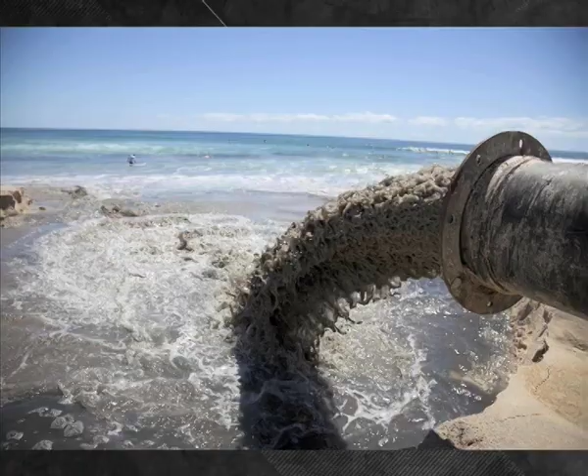Industry-related water pollution comes from toxic chemicals and heavy metals from mining and manufacturing, and power plant emissions that create acid rain that contaminates the surface water. People often bathe, wash their clothes and swim in contaminated water. They also drink water of uncertain quality coming from ponds and streams used by animals.

The water and air around the cities are polluted, and the water shortages and quality issues in rural areas are still rampant. Therefore, we need to do water management. Now, one may ask what water management is and what are the techniques of managing water. So, water management is the need of the time. It is the management of water resources for the coming generations.

It involves the activity of planning, developing, distributing and managing the optimum use of water resources. We would discuss the different methods through which water management and preservation can be done. Some of them are explained here. Let's start with rainwater harvesting. One of the most popular techniques is rainwater harvesting, which is the collection and storage of rainwater rather than allowing it to run off.

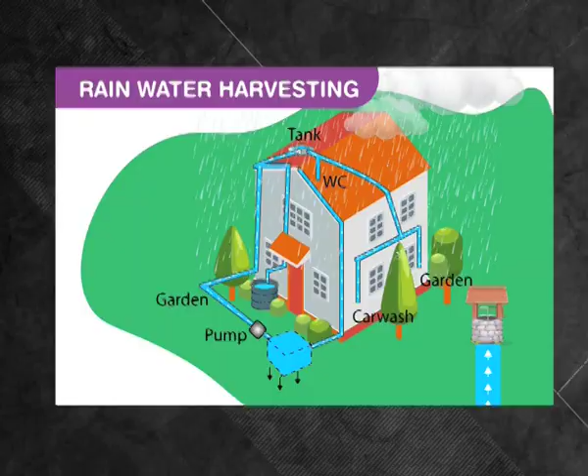Rainwater is collected from a roof-like surface and redirected to a tank, cistern, deep pit, well shaft or borehole, aquifer or a reservoir with percolation. Dew and fog can also be collected with nets or other such tools. Rainwater harvesting differs from stormwater harvesting, as the runoff is collected from roofs rather than creeks, drains, roads or any

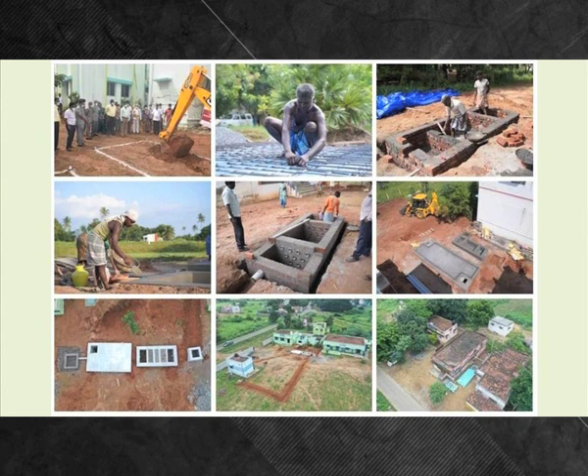other land surfaces. Its uses include watering gardens, livestock, irrigation, domestic use with proper treatment and domestic heating. The harvested water can also be committed to long-term storage or groundwater recharge. As an example, we talk about Tamil Nadu, which was the first state to make rainwater harvesting compulsory for every building to avoid groundwater depletion.

The scheme was launched in 2001 and has been implemented in all rural areas of Tamil Nadu henceforth. Posters all over Tamil Nadu, including rural areas, create awareness about harvesting rainwater. It gave excellent results within 5 years, and slowly every state took it as a role model. Since its implementation, Chennai has seen a 50% rise in water levels in 5 years, and the water quality significantly improved.

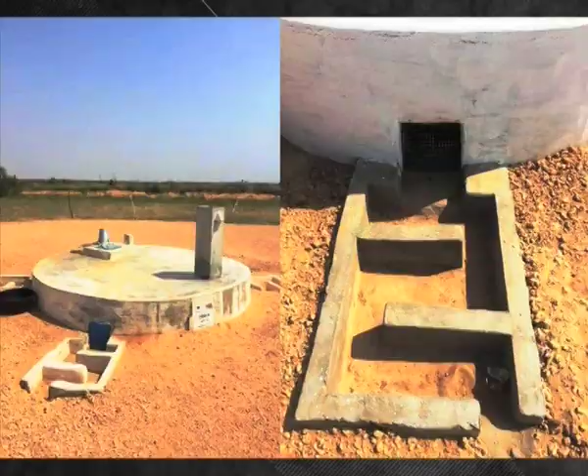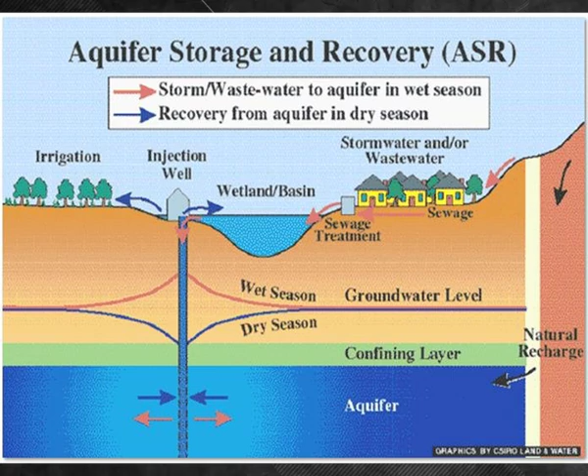In Rajasthan, where there is utmost dearth of water, rainwater harvesting has traditionally been practiced, especially by the people of the Thar Desert. Many ancient water harvesting systems in Rajasthan have now been revived. Another very powerful technique is groundwater recharge. Groundwater recharge is the enhancement of natural groundwater supplies using man-made conveyances such as infiltration basins, trenches, dams, or injection wells. Aquifer storage and recovery is a specific type of groundwater recharge practiced with the purpose of both augmenting groundwater resources and recovering the water in the future for various uses.

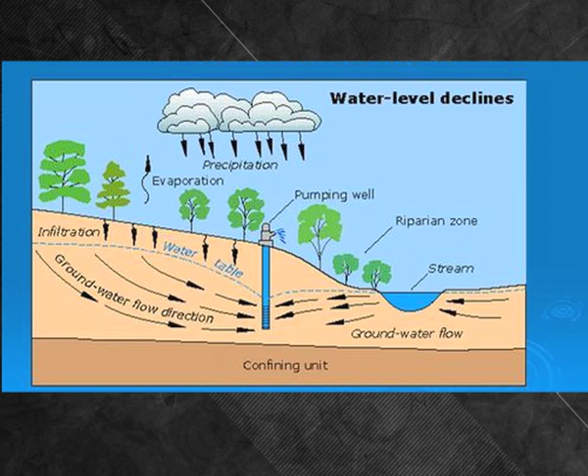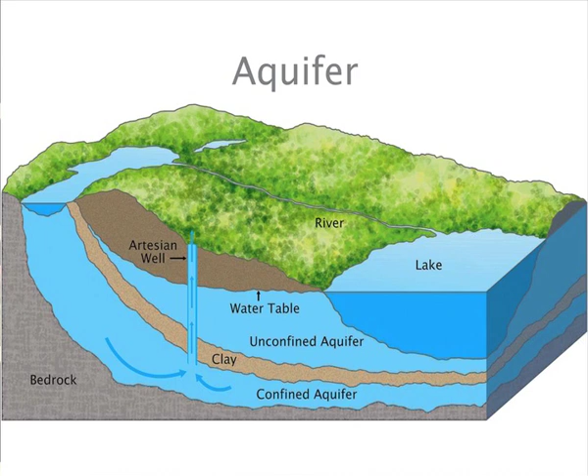Groundwater is recharged naturally by rain and snow melt, and to a small extent by surface waters. Recharge may be impeded somewhat by human activities, including paving, development, or logging. These activities can result in the loss of topsoil, resulting in reduced water infiltration, enhanced surface runoff, and reduction in recharge. The use of groundwater, especially for irrigation, may also lower the water tables. Groundwater recharge is an important process for sustainable groundwater management, since the volume rate abstracted from an aquifer in the long term should be less than or equal to the volume rate that is recharged.

Recharge can help move excess salts that accumulate in the root zone to deeper soil layers or into the groundwater system. Tree roots increase water saturation into groundwater, reducing water runoff. Flooding temporarily increases riverbed permeability by moving the clay soil downstream, and this increases aquifer recharge. A simple and useful technique of water conservation is artificial groundwater recharge. Groundwater levels are declining across the country as our withdrawals exceed the rate of aquifers to naturally replenish themselves, called recharge. One method of controlling declining water levels is by using artificial groundwater recharge.

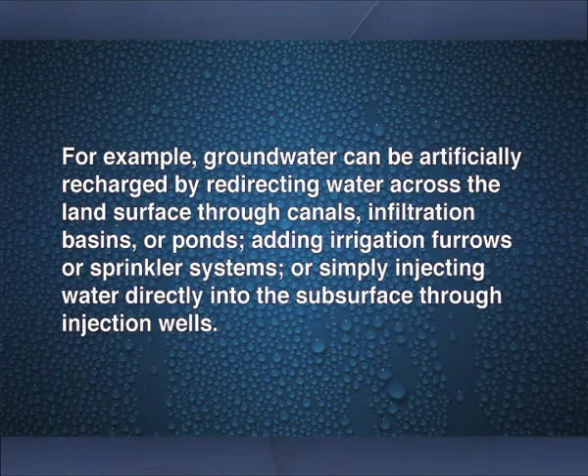Artificial recharge is the practice of increasing the amount of water that enters an aquifer through human-controlled means. For example, groundwater can be artificially recharged by redirecting water across the land surface through canals, infiltration basins, or ponds, adding irrigation furrows or sprinkler systems, or simply injecting water directly into the subsurface through injection wells. Artificial groundwater recharge is becoming increasingly important in India, where the overpumping of groundwater by farmers has led to underground resources becoming depleted.

In 2007, on the recommendation of the International Water Management Institute, the Indian government allocated 1,800 crores to fund dug well recharge projects. A dug well is a wide, shallow well, often lined with concrete, in 100 districts within 7 states where water stored in hard rock aquifers has been overexploited. Another environmental issue is the disposal of waste through water, from sources such as dairy farms, industrial and urban runoffs. A new and useful method of saving water is drip irrigation.

Drip irrigation is a type of micro-irrigation system that has the potential to save water and nutrients by allowing water to drip slowly to the roots of the plant, either from above the soil surface or buried below the surface. The goal is to place water directly into the root zone and minimize evaporation.

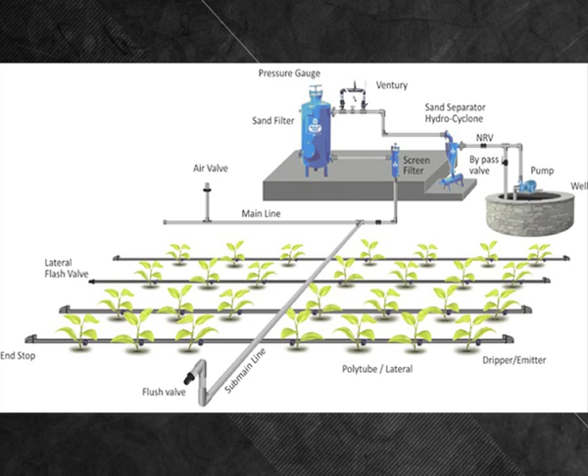Drip irrigation systems distribute water through a network of valves, pipes, tubing, and emitters. Depending on how well designed, installed, maintained, and operated it is, a drip irrigation system can be more efficient than other types of irrigation systems, such as surface irrigation or sprinkler irrigation.

In the drip irrigation process, water and nutrients are delivered across the field in pipes called dripper lines, featuring smaller units known as drippers. Each dripper emits drops containing water and fertilizer, resulting in the uniform application of water and nutrients directly to each plant's root zone across an entire field.

A drip irrigation system delivers water to the crop using a network of main lines, sub-mains, and lateral lines with emission points spaced along their lengths. Each dripper emitter's orifice supplies a measured, precisely controlled uniform application of water, nutrients, and other required growth substances directly into the root zone of the plant.

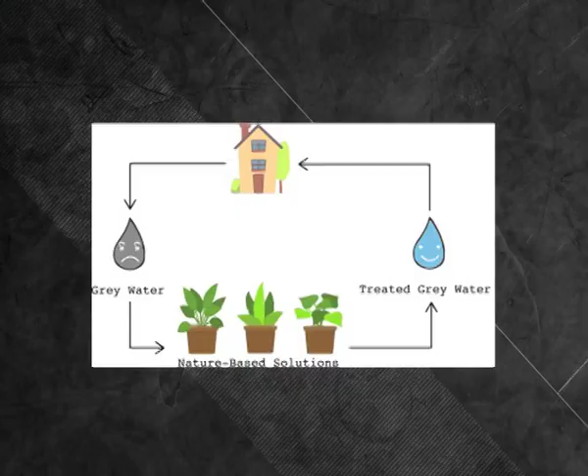Another very unconventional way of saving water is by a technique called grey water. Grey water is gently used water from your bathroom sinks, showers, tubs, and washing machines. It is not water that has come into contact with feces, either from the toilet or from washing diapers. Grey water may contain traces of dirt, food, grease, hair, and certain household cleaning products. While grey water may look dirty, it is a safe and even beneficial source of irrigation water in a yard.

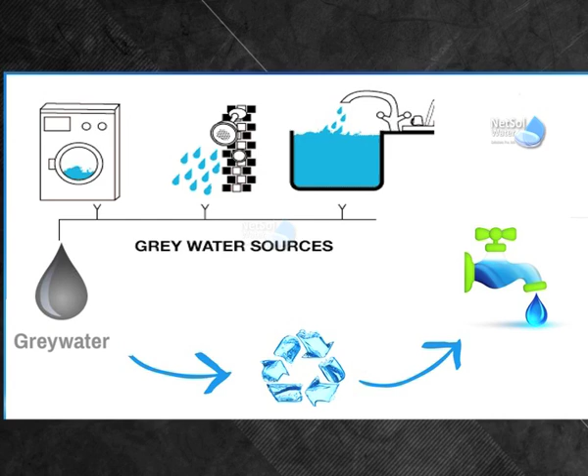Grey water is water from basins, baths, and showers that is piped to a surge tank. The grey water is held briefly in the tank before being discharged to an irrigation or a treatment system. The grey water can be diverted either by gravity or by using a pump. The surge tank can be a type of container that is suitable for holding but not storing the initial surge of the water.

The surge tank must be emptied completely each time grey water is dispersed to the irrigation or treatment system. Grey water must not sit for extended periods of time in the tank. A gravity system can only be used when there is sufficient fall from the laundry or bathroom drain to the storage tank.

An old but very useful technique is sewage water treatment. Sewage treatment is the process of removing contaminants from municipal wastewater, containing mainly household sewage plus some industrial wastewater. Physical, chemical, and biological processes are used to remove contaminants and produce treated wastewater, or treated effluent, that is safe enough for release into the environment.

A byproduct of sewage treatment is a semi-solid waste or slurry called sewage sludge. The sludge has to undergo further treatment before being suitable for disposal or application to land. For most cities, the sewage system will also carry a proportion of the industrial effluents to the sewage treatment plant, which has usually received pre-treatment at the factories themselves to reduce the pollutant load.

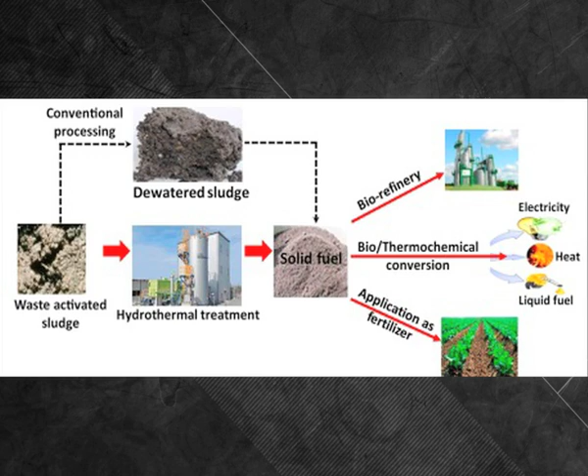If the sewer system is a combined sewer, then it will also carry urban runoff, storm water, to the sewage treatment plant. Sewage water can travel across treatment plants via piping, in a flow aided by gravity and pumps. The first part of the filtration of sewage typically includes a bar screen to filter solids and large objects, which are then collected in dumpsters and disposed of in landfills. Fat and grease are also removed before the primary treatment of the sewage.

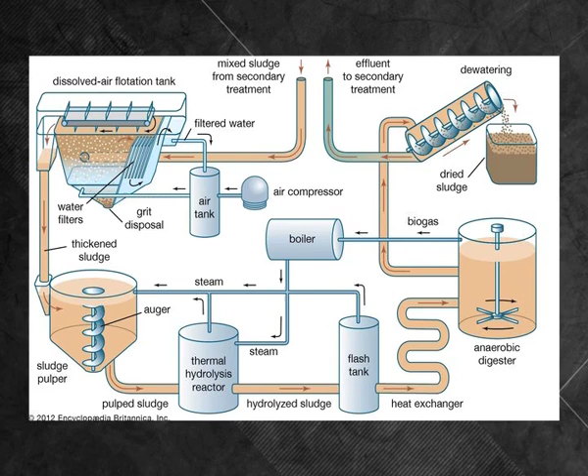Now let's move on to a very interesting water conservation technique in which there is coordinated use of surface water and groundwater. It is known as conjunctive use. We already discussed conjunctive use, a catchphrase for the coordinated use of surface water and groundwater, literally going with the flow to maximize sustainable yield. Conjunctive use of groundwater and surface water in an irrigation setting is the process of using water from the two different sources for consumptive purposes.

Conjunctive use can refer to the practice at the farm level of sourcing water from both a well and from an irrigation delivery canal, or can refer to a strategic approach at the irrigation command level, where surface water and groundwater inputs are centrally managed as an input to irrigation systems.

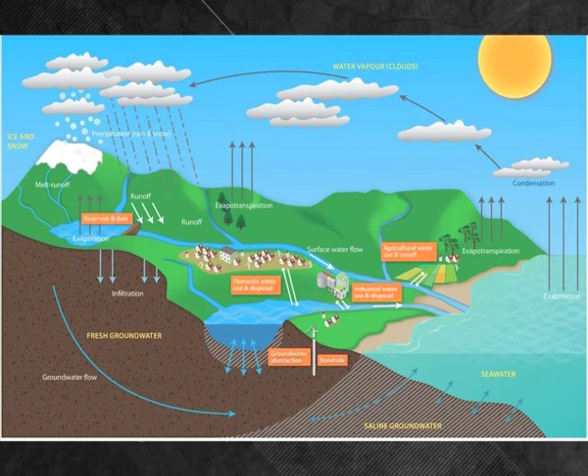The planned conjunctive use of groundwater and surface water has the potential to offer benefits in terms of economic and social outcomes through significantly increased water use efficiency. It supports greater food and fiber yield per unit of water use, an important consideration within the international policy arena, given the critical concerns for food security that prevail in many parts of the world.

In fact, at the resource level, groundwater pumping for irrigation used in conjunction with surface water provides benefits that increase the water supply or mitigate undesirable fluctuations in the supply, and control shallow water table levels and consequent soil salinity.

A well-practiced technique we will discuss now is aquifer storage and recovery. Aquifer storage and recovery is a direct injection of surface water supplies, such as potable water, reclaimed water, rainwater, or river water, into an aquifer for later recovery and use. The injection and extraction is often done by means of a well.

In areas where the rainwater cannot percolate the soil or is not capable of percolating it fast enough, that is, urban areas, and where the rainwater is thus diverted to the rivers, rainwater ASR could help to keep the rainwater within an area. ASR is used for municipal, industrial and agricultural purposes.

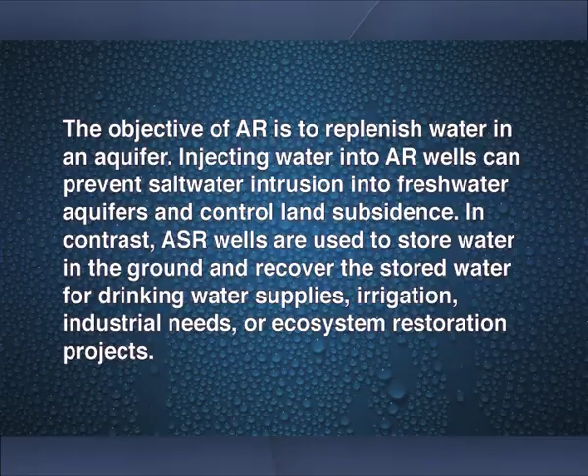The objective of AR is to replenish water in an aquifer. Injecting water into AR wells can prevent saltwater intrusion into freshwater aquifers and control land subsidence. In contrast, ASR wells are used to store water in the ground and recover the stored water for drinking water supplies, irrigation, industrial needs, or ecosystem restoration projects. The stored water may be recovered from the same well used for injection or from nearby injection or recovery wells.

We will now talk about desalting water and extracting minerals using desalination techniques. Desalination is a process that takes away the mineral components from saline water. More generally, desalination refers to the removal of salts and minerals from a target substance, as in soil desalination, which is an issue for agriculture. Salt water is desalinated to produce water suitable for human consumption or irrigation.

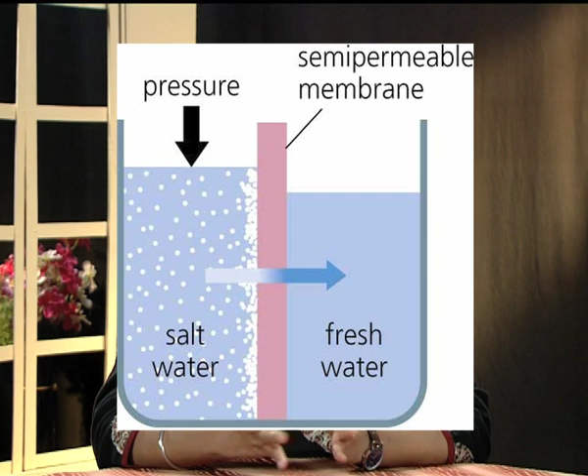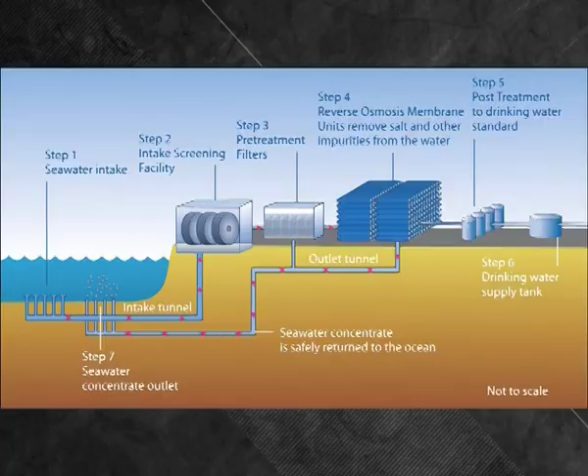The byproduct of the desalination process is brine. Desalination is used in many seagoing ships and submarines. Most of the modern interest in desalination is focused on the cost-effective provision of fresh water for human use. Along with recycled wastewater, it is one of the few rainfall-independent water resources. The process may be used for municipal, industrial, or commercial uses.

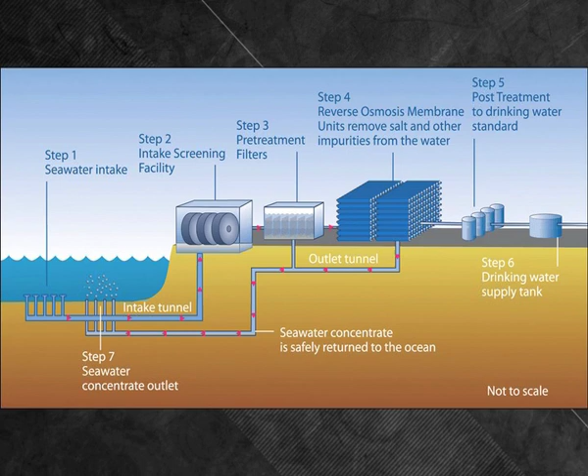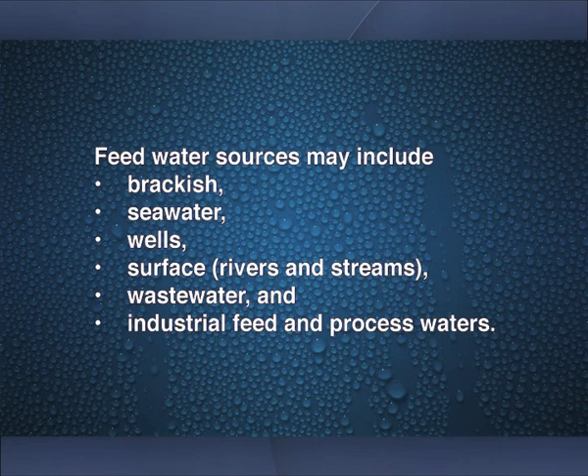The water desalination process separates the dissolved salts and other minerals from the water. Feed water sources may include brackish water, seawater, wells, surface water, that is rivers and streams, wastewater, industrial feed and process waters.

Membrane separation requires driving forces, including applied and vapor pressure, electric potential, and concentration, to overcome natural osmosis pressures and effectively force water through membrane processes. As such, the technology is energy intensive, and research is continuously developing and evolving to improve the efficiency and reduce the energy consumption. It's about time we start discussing the benefits of water conservation.

Water management can offer many benefits to state and local governments. Some of these benefits include reduced water and sewer costs. When we save water, we make more for the coming generations. Therefore, low flow water conservation devices reduce water usage and cost as well as sewer costs.

Weather-based irrigation controls. Decades ago, people used to depend on the weather for agriculture and water. This is not the case now. But when we conserve water, it affects the agriculture sector too. This type of control system saves water usage and cost, especially during the hot summer months.

Reduced energy usage. Energy deficit is an area of large concern, and thus saving energy is the key to a lot of problems. Interestingly, low flow water devices reduce the amount of hot water used, which in turn reduces the amount of energy used to heat the water.